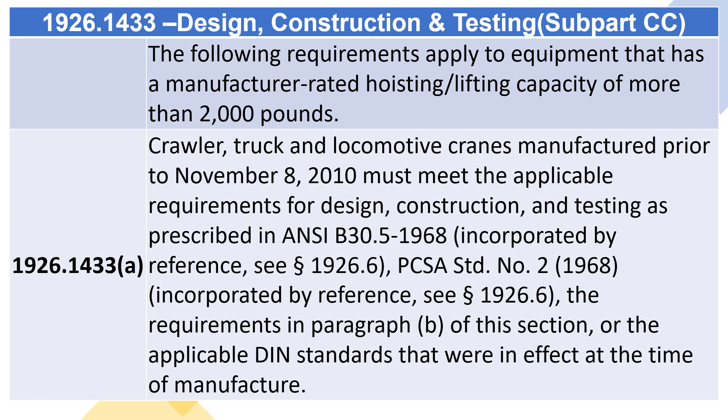1926.1433, B. Mobile, including crawler and truck, and locomotive cranes manufactured on or after November 8, 2010 must meet the following portions of ASME B30.5-2004, incorporated by reference, see Section 1926.6, as applicable.

1926.1433, B1 through B16, in Section 5-1.1.1, Load Ratings where stability governs lifting performance, paragraphs A through D, including subparagraphs. In Section 5-1.1.2, Load Ratings where structural competence governs lifting performance, paragraph B.

Section 5-1.2, Stability, backward and forward. In Section 5-1.3.1, Boom hoist mechanism, paragraphs A, B1, and B2, except that when using rotation-resistant rope, Section 1926.1414, C4, 2A, applies.

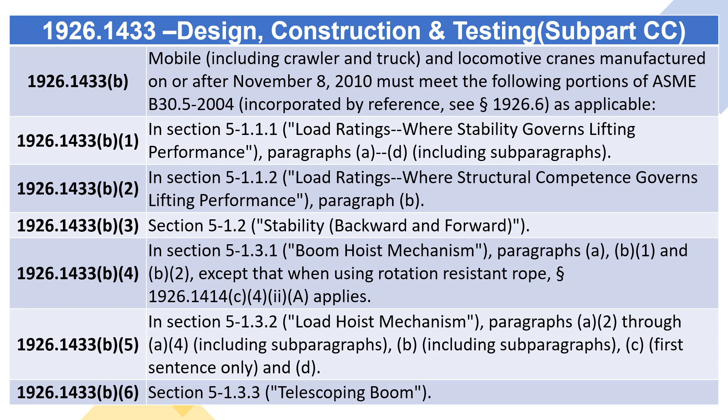In Section 5-1.3.2, Load hoist mechanism, paragraphs A2 through A4, including subparagraphs B, including subparagraphs C, first sentence only, and D. Section 5-1.3.3, Telescoping boom. Section 5-1.4, Swing mechanism.

In Section 5-1.5, Crane travel, all provisions except 5-1.5.3, D. In Section 5-1.6, Controls, all provisions except 5-1.6.1, C. Section 5-1.7.4, Sheaves.

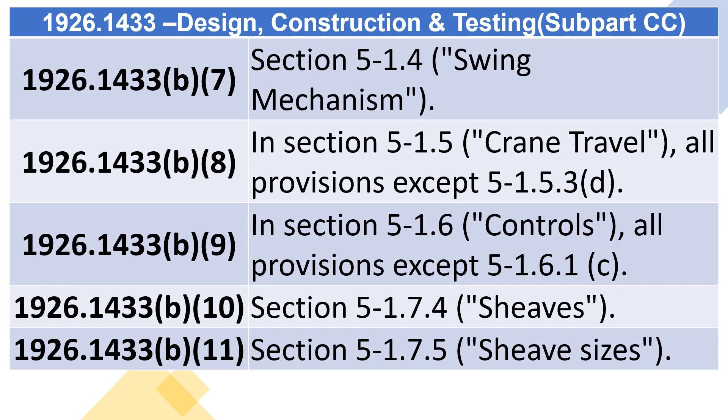Section 5-1.7.5, Sheave sizes. In Section 5-1.9.1, Booms, paragraph F. Section 5-1.9.3, Outriggers. Section 5-1.9.4, Locomotive crane equipment. Section 5-1.9.7, Clutch and brake protection.

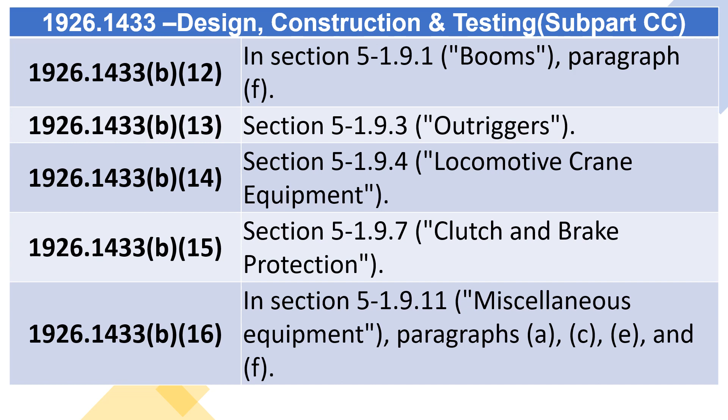In Section 5-1.9.11, Miscellaneous equipment, paragraphs A, C, E, and F.

1926.1433, C. Prototype testing. Mobile, including crawler and truck, and locomotive cranes manufactured on or after November 8, 2010 must meet the prototype testing requirements in Test Option A or Test Option B of this section.

Tower cranes manufactured on or after November 8, 2010 must meet the prototype testing requirements in BSEN 14439:2006, incorporated by reference, see Section 1926.6.

Note: prototype testing of crawler, locomotive, and truck cranes manufactured prior to November 8, 2010 must conform to paragraph A of this section.

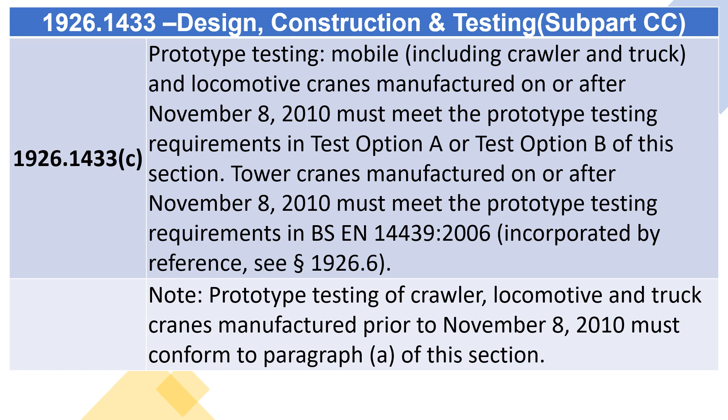1926.1433, C1, Test Option A. 1926.1433, C1I, and C1-2, the following applies to equipment with cantilevered booms, such as hydraulic boom cranes.

All the tests listed in SAE J1063, November 1993, Table 1, incorporated by reference, see Section 1926.6, must be performed to load all critical structural elements to their respective limits. All the strength margins listed in SAE J1063, November 1993, Table 2, incorporated by reference, see Section 1926.6, must be met.

The following applies to equipment with pendant-supported lattice booms. All the tests listed in SAE J987, June 2003, Table 1, incorporated by reference, see Section 1926.6, must be performed to load all critical structural elements to their respective limits.

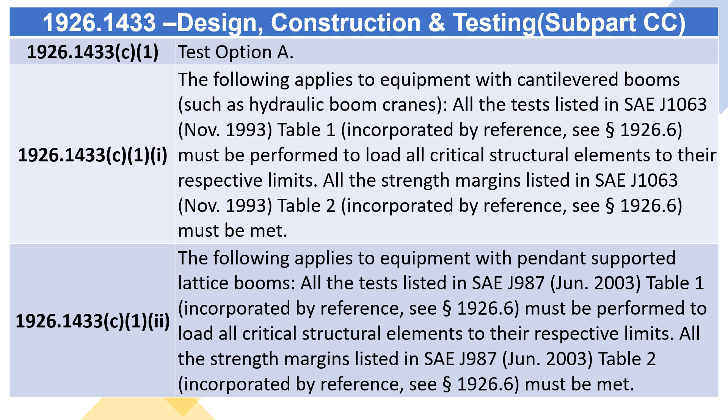All the strength margins listed in SAE J987, June 2003, Table 2, incorporated by reference, see Section 1926.6, must be met. 1926.1433, C2, Test Option B.

The testing and verification requirements of BSEN 13,000:2004, incorporated by reference, see Section 1926.6, must be met. In applying BSEN 13,000:2004, the following additional requirements must be met.

1926.1433, C2I through C2-3. The following applies to equipment with cantilevered booms, such as hydraulic boom cranes. The analysis methodology, computer modeling, must demonstrate that all load cases listed in SAE J1063, November 1993, incorporated by reference, see Section 1926.6, meet the strength margins listed in SAE J1063, November 1993, Table 2.

The following applies to equipment with pendant-supported lattice booms. The analysis methodology, computer modeling, must demonstrate that all load cases listed in SAE J987, June 2003, incorporated by reference, see Section 1926.6, meet the strength margins listed in SAE J987, June 2003, Table 2.

Analysis verification. The physical testing requirements under SAE J1063, November 1993, incorporated by reference, see Section 1926.6, and SAE J987, June 2003, incorporated by reference, see Section 1926.6, must be met unless the reliability of the analysis methodology, computer modeling, has been demonstrated by a documented history of verification through strain gauge measuring or strain gauge measuring in combination with other physical testing.

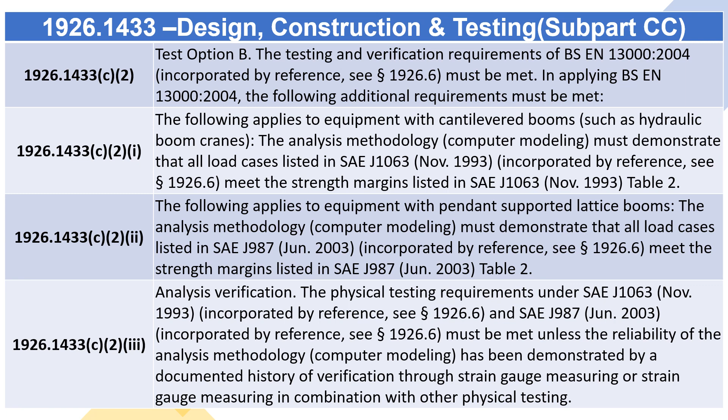1926.1433, D. All equipment covered by this subpart must meet the following requirements. 1926.1433, D1. Rated capacity and related information. The information available in the cab, see Section 1926.1417, C, regarding rated capacity and related information must include, at a minimum, the following information.

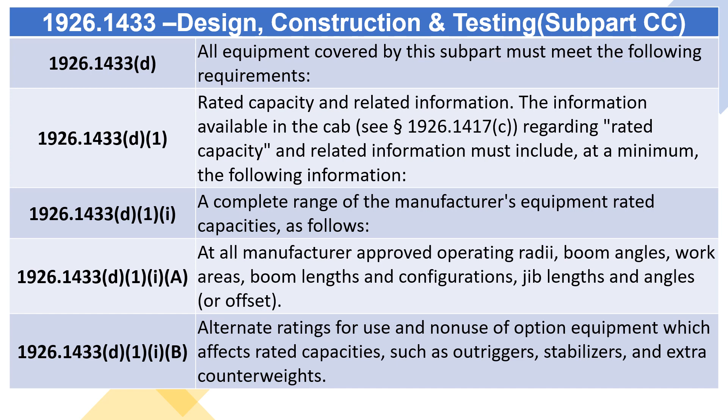1926.1433, D1A, a complete range of the manufacturer's equipment rated capacities, as follows: at all manufacturer-approved operating radii, boom angles, work areas, boom lengths and configurations, jib lengths and angles, or offset. Alternate ratings for use and non-use of option equipment which affects rated capacities, such as outriggers, stabilizers, and extra counterweights.

1926.1433, D1-2 through D1-16, a work area chart for which capacities are listed in the load chart. Note, an example of this type of chart is in ASME B30.5-2004, Section 5-1.1.3, Figure 11.

The work area figure and load chart must clearly indicate the areas where no load is to be handled. Recommended reeving for the hoist lines must be shown. Recommended parts of hoist reeving, size, and type of wire rope for various equipment loads. Recommended boom hoist reeving diagram, where applicable, size, type and length of wire rope.

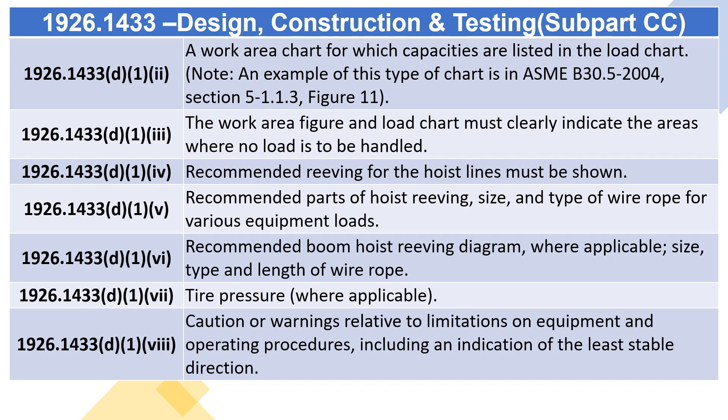Tire pressure, where applicable. Caution or warnings relative to limitations on equipment and operating procedures, including an indication of the least stable direction. Position of the gantry and requirements for intermediate boom suspension, where applicable.

Instructions for boom erection and conditions under which the boom or boom and jib combinations may be raised or lowered. Whether the hoist holding mechanism is automatically or manually controlled, whether free fall is available, or any combination of these.

The maximum telescopic travel length of each boom telescopic section. Whether sections are telescoped manually or with power. The sequence and procedure for extending and retracting the telescopic boom section.

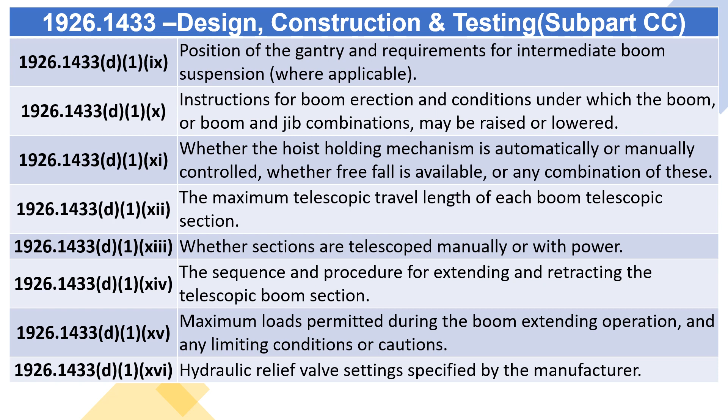Maximum loads permitted during the boom extending operation, and any limiting conditions or cautions. Hydraulic relief valve settings specified by the manufacturer.

1926.1433 (d)(2). Load hooks, including latched and unlatched types, ball assemblies and load blocks must be of sufficient weight to overhaul the line from the highest hook position for boom or boom and jib lengths and the number of parts of the line in use.

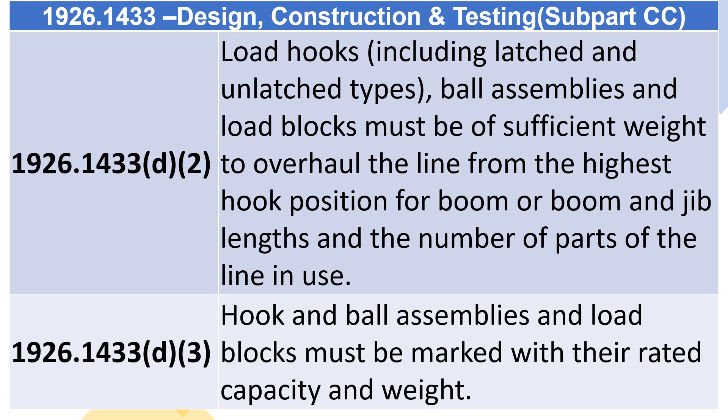1926.1433 (d)(3). Hook and ball assemblies and load blocks must be marked with their rated capacity and weight.

1926.1433 (d)(4). Latching hooks. Hooks must be equipped with latches, except where the requirements of paragraph (d)(4)(2) of this section are met.

1926.1433 (d)(4)(2). Hooks without latches, or with latches removed or disabled, must not be used unless a qualified person has determined that it is safer to hoist and place the load without latches, or with the latches removed or tied back.

1926.1433 (d)(4)(2)(B). Routes for the loads are pre-planned to ensure that no employee is required to work in the fall zone except for employees necessary for the hooking or unhooking of the load.

1926.1433 (d)(4)(3). The latch must close the throat opening and be designed to retain slings or other lifting devices and accessories in the hook when the rigging apparatus is slack.

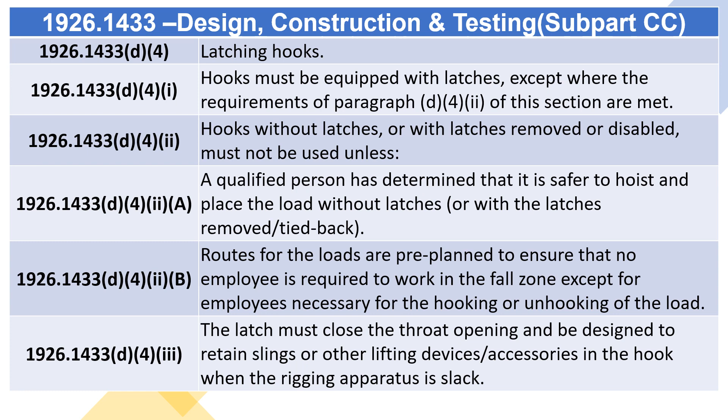1926.1433 (d)(5). Posted warnings. Posted warnings required by this subpart as well as those originally supplied with the equipment by the manufacturer must be maintained in legible condition.

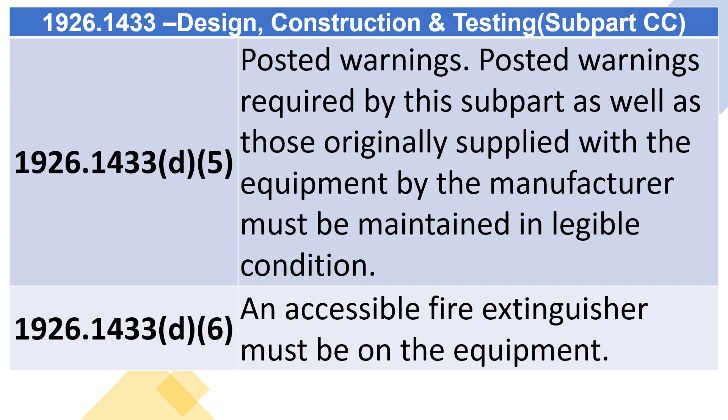1926.1433 (d)(6). An accessible fire extinguisher must be on the equipment. 1926.1433 (d)(7). Cabs. Equipment with cabs must meet the following requirements.

1926.1433 (d)(7)(i) through (d)(7)(3). Cabs must be designed with a form of adjustable ventilation and a method for clearing the windshield, for maintaining visibility and air circulation.

Examples of means for adjustable ventilation include an air conditioner or window that can be opened, for ventilation and air circulation. Examples of means for maintaining visibility include a heater for preventing windshield icing, a defroster, a fan, and a windshield wiper.

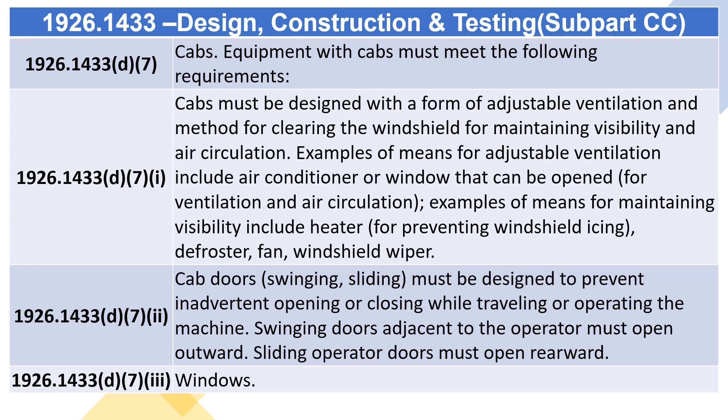Cab doors, swinging or sliding, must be designed to prevent inadvertent opening or closing while traveling or operating the machine. Swinging doors adjacent to the operator must open outward. Sliding operator doors must open rearward.

Windows. 1926.1433 (d)(7)(3)(A) through (C). The cab must have windows in front and on both sides of the operator. Forward vertical visibility must be sufficient to give the operator a view of the boom point at all times.

Windows may have sections designed to be opened or readily removed. Windows with sections designed to be opened must be designed so that they can be secured to prevent inadvertent closure.

Windows must be of safety glass or material with similar optical and safety properties that introduce no visible distortion or otherwise obscure visibility that interferes with the safe operation of the equipment.

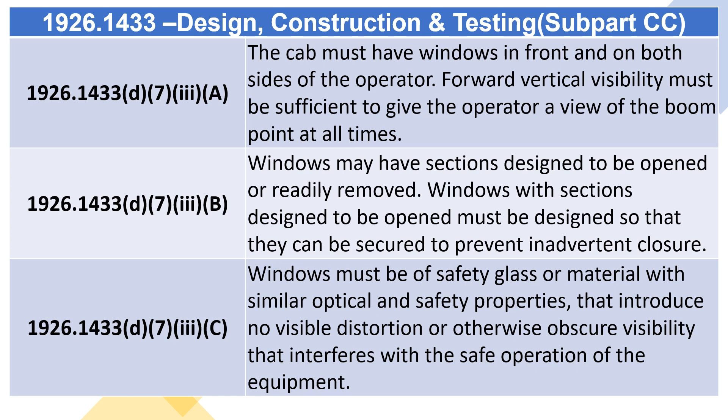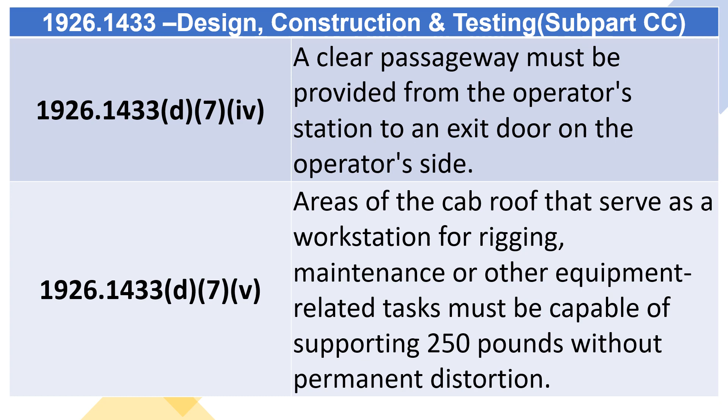1926.1433 (d)(7)(iv) through (d)(7)(v). A clear passageway must be provided from the operator's station to an exit door on the operator's side. Areas of the cab roof that serve as a workstation for rigging, maintenance, or other equipment-related tasks must be capable of supporting 250 pounds without permanent distortion.

1926.1433 (d)(8) through (d)(11). Belts, gears, shafts, pulleys, sprockets, spindles, drums, flywheels, chains, and other parts or components that reciprocate, rotate, or otherwise move must be guarded where contact by employees, except for maintenance and repair employees, is possible in the performance of normal duties.

All exhaust pipes, turbochargers, and charge air coolers must be insulated or guarded where contact by employees, except for maintenance and repair employees, is possible in the performance of normal duties.

Hydraulic and pneumatic lines must be protected from damage to the extent feasible. The equipment must be designed so that exhaust fumes are not discharged in the cab and are discharged in a direction away from the operator.

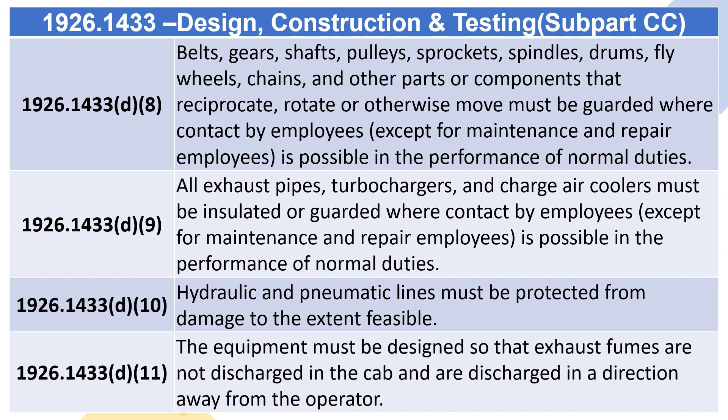1926.1433 (d)(12). Friction mechanisms. Where friction mechanisms, such as brakes and clutches, are used to control the boom hoist or load line hoist, they must be

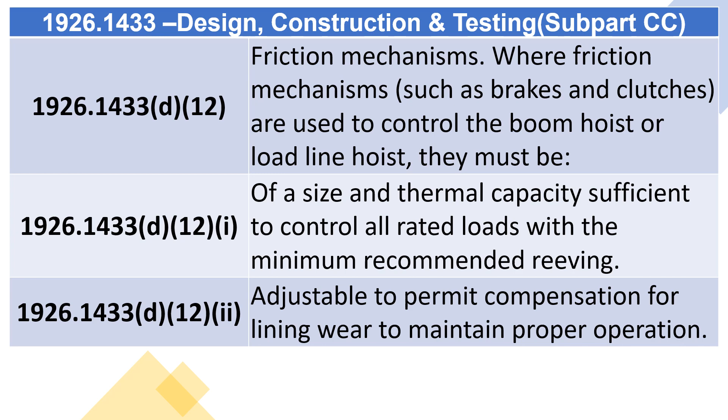1926.1433 (d)(12)(i) and (d)(12)(ii): of a size and thermal capacity sufficient to control all rated loads with the minimum recommended reeving, and adjustable to permit compensation for lining wear to maintain proper operation.

1926.1433 (d)(13). Hydraulic load hoists. Hydraulic drums must have an integrally mounted holding device or internal static brake to prevent load hoist movement in the event of hydraulic failure.

The employer's obligations under paragraphs (a) through (c) and (d)(7) through (13) of this section are met where the equipment has not changed, except in accordance with section

1926.1434, equipment modifications, and it can refer to documentation from the manufacturer showing that the equipment has been designed, constructed, and tested in accordance with those paragraphs.